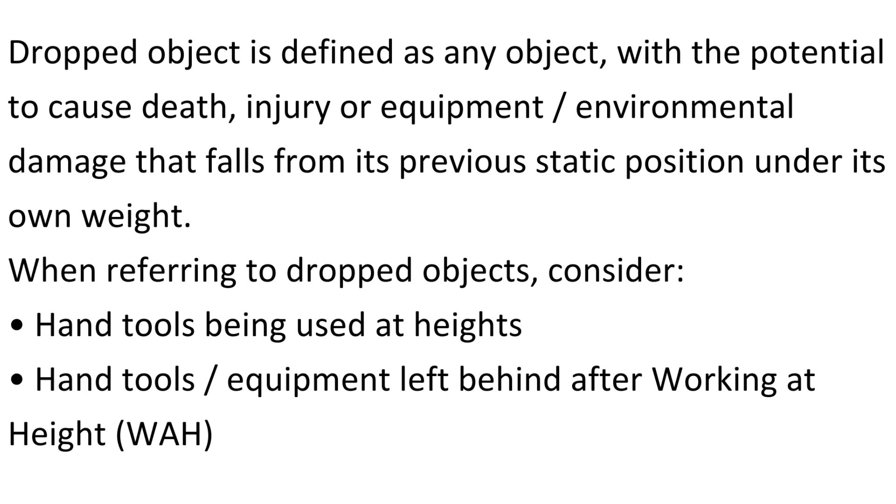When referring to dropped objects, consider hand tools being used at heights, hand tools and equipment left behind after working at height, and small items such as bolts, wedges, welding rods and clamps not within suitable storage containers, placed or forgotten at elevated work areas or placed into scaffold tubes.

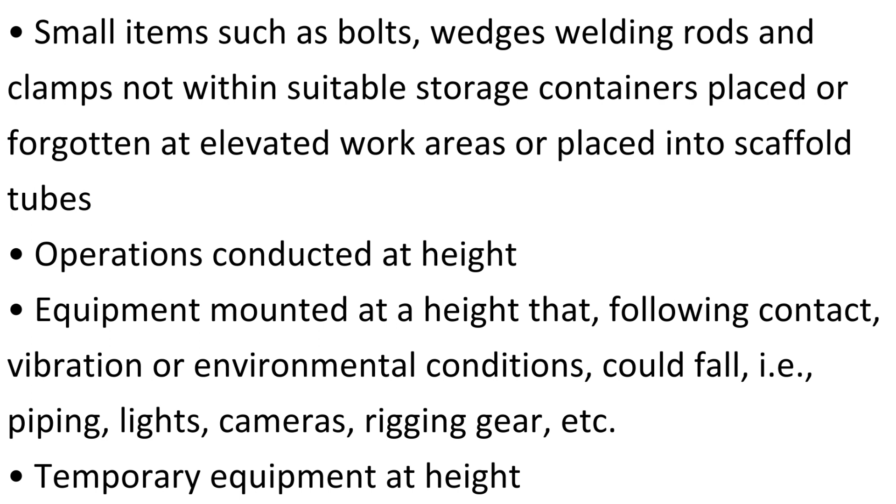Operations conducted at height, equipment mounted at a height that, following contact, vibration or environmental conditions, could fall, that is piping, lights, cameras, rigging gear, etc. Also temporary equipment at height, where personnel are working on a level directly below the work area, and lifting operations.

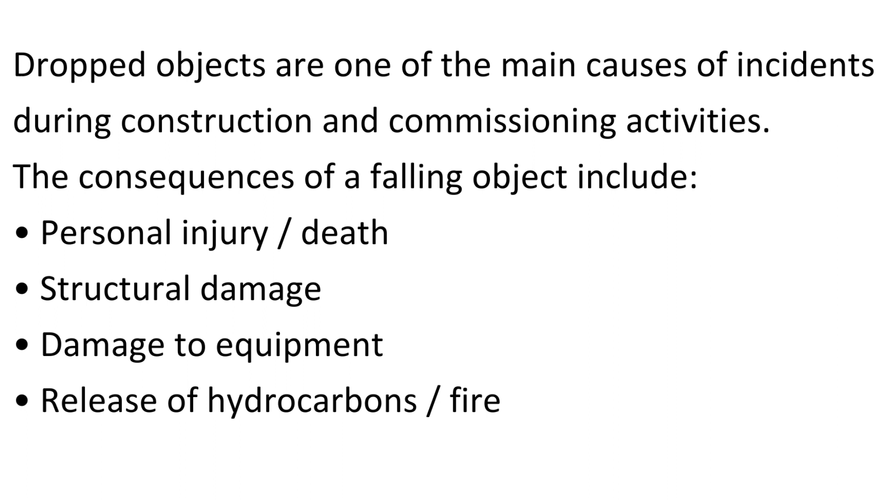Consequences of dropped objects: dropped objects are one of the main causes of incidents during construction and commissioning activities. The consequences of a falling object include personal injury, death, structural damage, damage to equipment, release of hydrocarbons, and fire.

Strategy to prevent dropped objects. Prevention of dropped objects will be based on the hierarchy of controls as listed below. Elimination: eliminate dropped object potential. Substitution: substitute the need to take objects that might drop by performing activities on the ground.

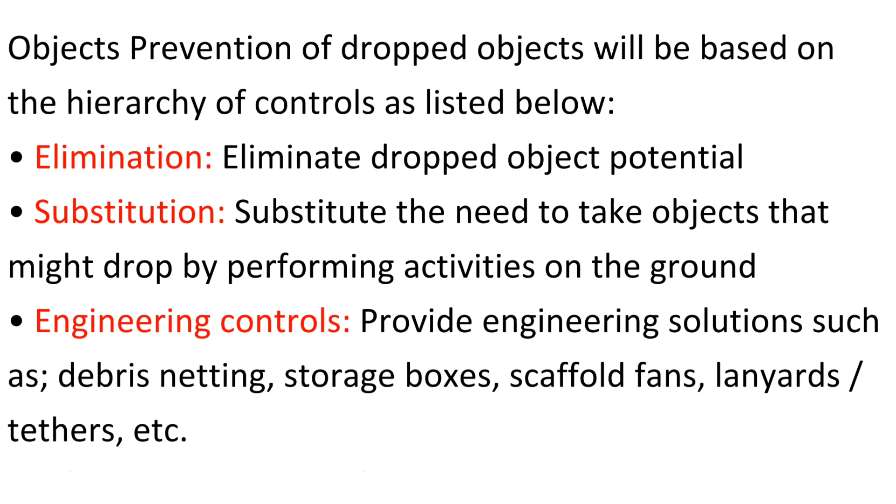Engineering controls: provide engineering solutions such as debris netting, storage boxes, scaffold fans, lanyards, tethers, etc. Administrative controls: training, TBT, awareness campaigns, etc. PPE: provide suitable PPE to protect personnel against dropped objects.

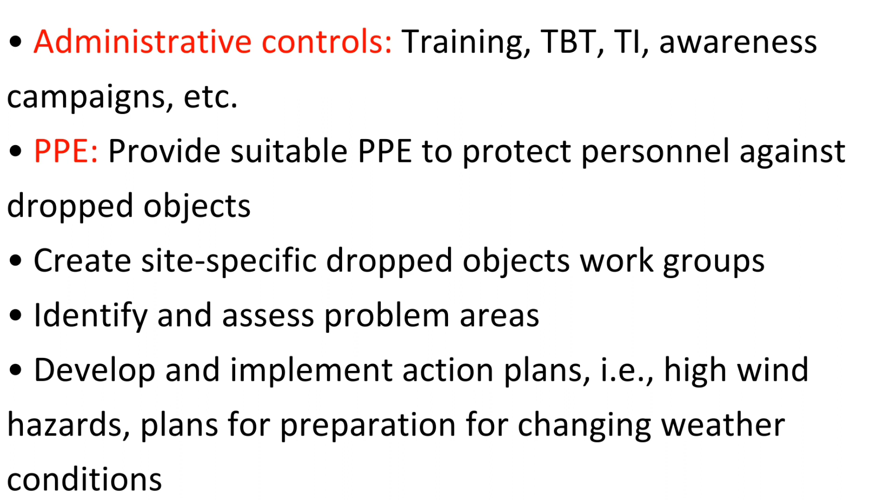Create site-specific dropped objects work groups. Identify and assess problem areas. Develop and implement action plans, that is, high wind hazards, plans for preparation for changing weather conditions. Monitor results and continually improve.

Risk areas prone to dropped objects. Experience from lessons learned indicated that the following are the most common areas on a construction site prone to dropped objects incidents. This list is not all inclusive.

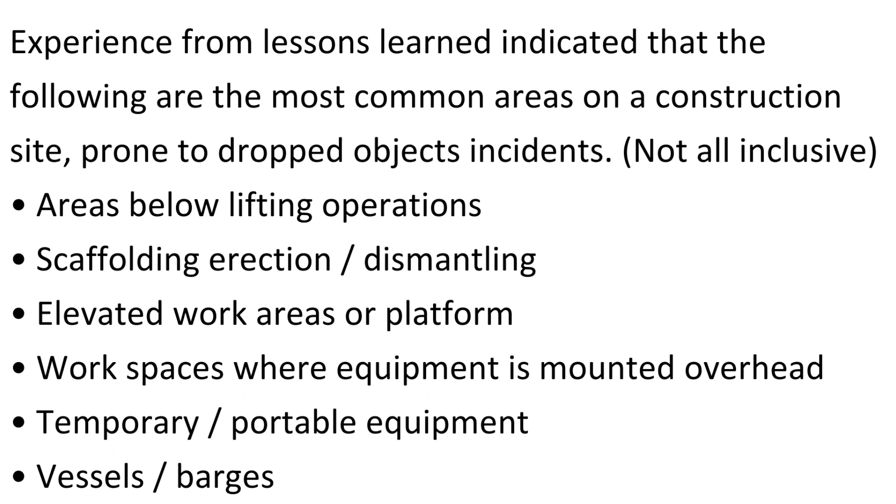Areas below lifting operations, scaffolding erection and dismantling, elevated work areas or platforms, workspaces where equipment is mounted overhead, and temporary, portable equipment on vessels and barges.

Pipe racks, bolting, unbolting, grinding, flange installations, etc. Unsecured loads on forklift trucks. Poor stacking of materials. Loading and unloading of material from trucks. Accessing ladders with tools. Work near deep excavations where objects or stones can fall in.

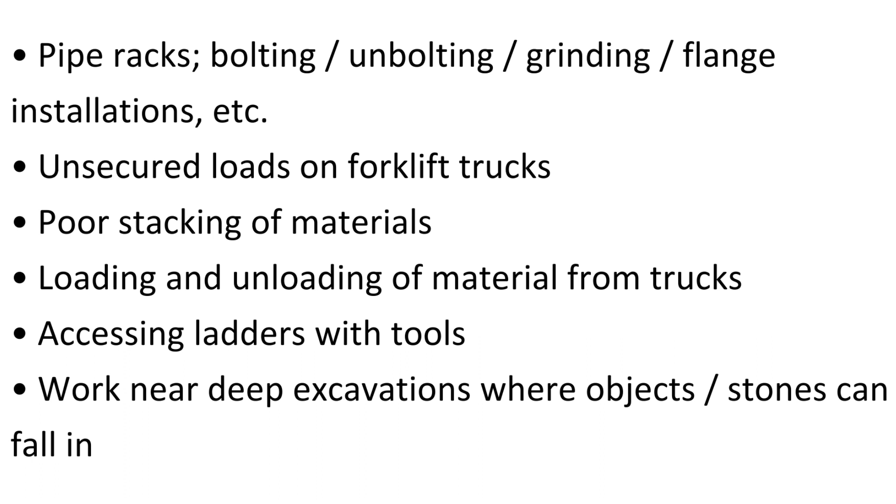Causes of dropped objects: inadequate application of the dropped object hierarchy of controls, poor housekeeping, scrap and debris left aloft, lack of or poor inspection, no equipment maintenance, and poor designs.

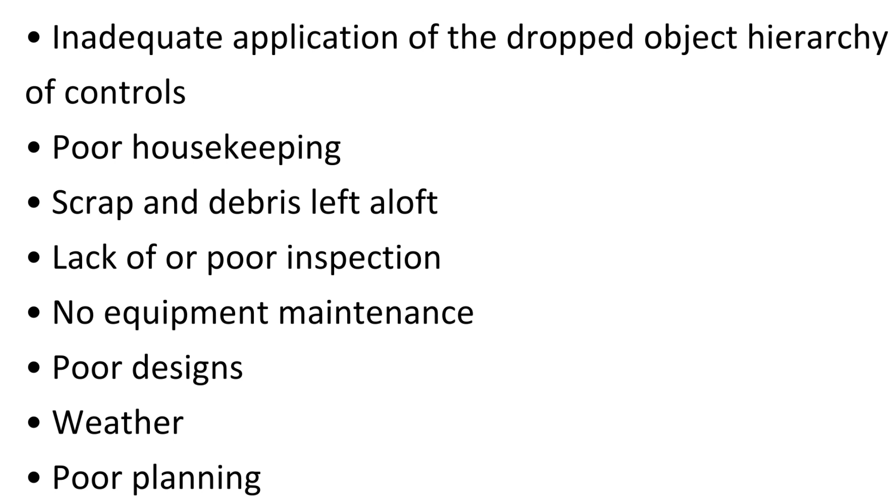Weather. Poor planning. Load miscalculation or poor quality inspection of lifting gear. Lack of risk assessment. Instability. Ineffective control of equipment or tools taken aloft.

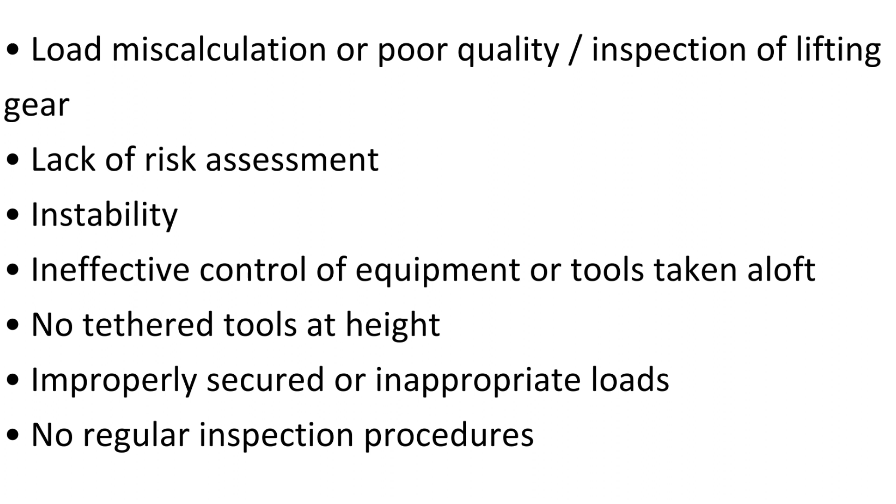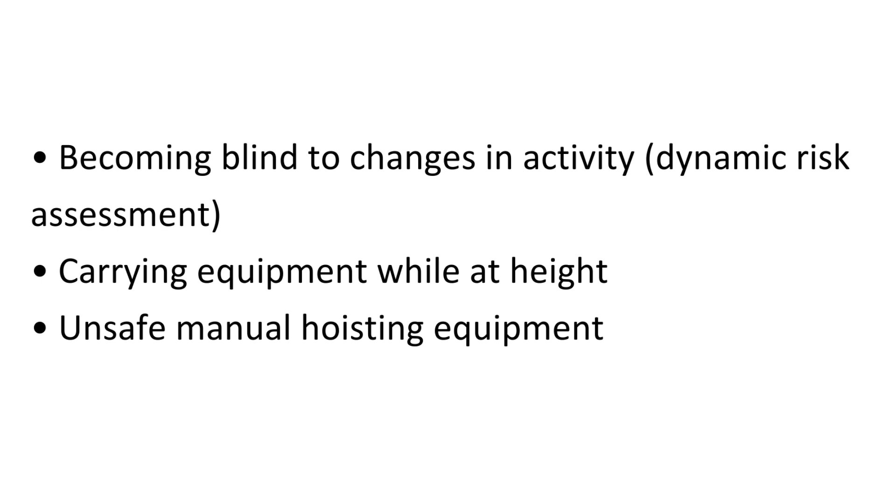No tethered tools at height. Improperly secured or inappropriate loads. No regular inspection procedures. Becoming blind to changes in activity, dynamic risk assessment. Carrying equipment while at height. Unsafe manual hoisting equipment.

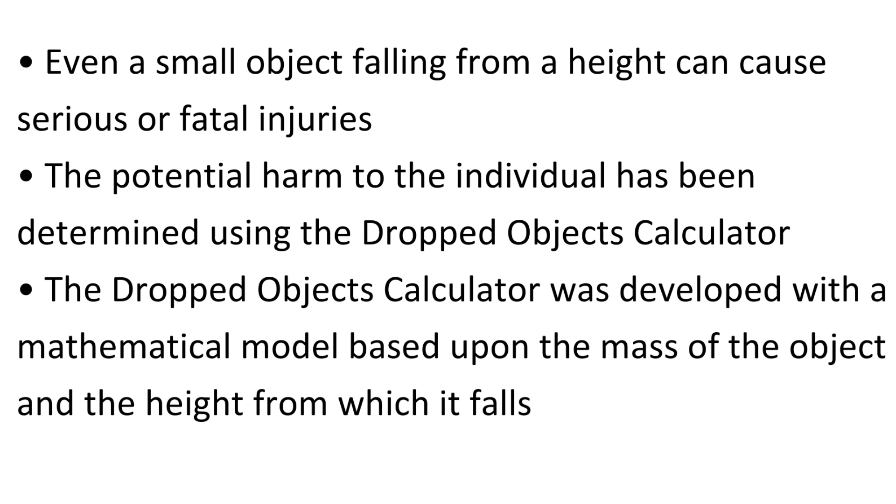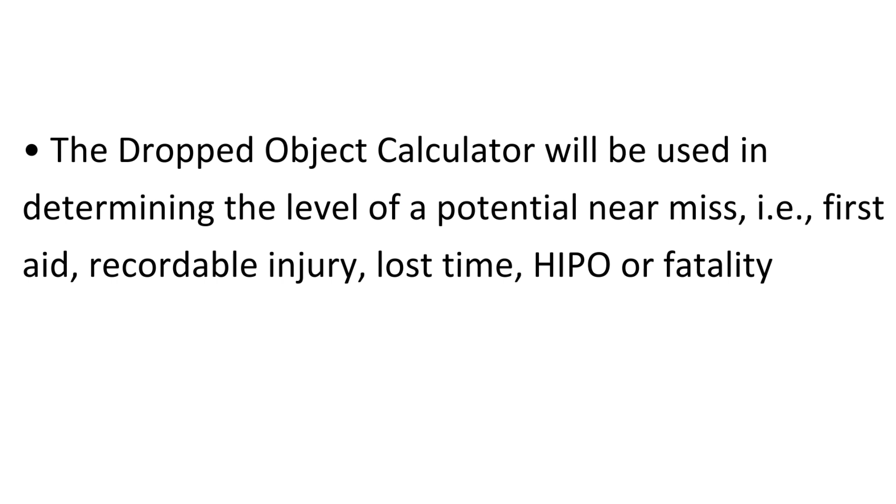Impact of dropped objects: even a small object falling from a height can cause serious or fatal injuries. The potential harm to the individual has been determined using the dropped objects calculator, developed with a mathematical model based upon the mass of the object and the height from which it falls. The calculator will be used in determining the level of a potential near miss, that is, first aid, recordable injury, lost time, HIPO, or fatality.

Dropped object prevention: subcontractor SHES and construction personnel will establish a dropped object work group specific to the site. The objectives of the dropped objects work group will be to complete a worksite dropped objects inventory using a hazard ID tool based on the dropped objects hierarchy of controls.

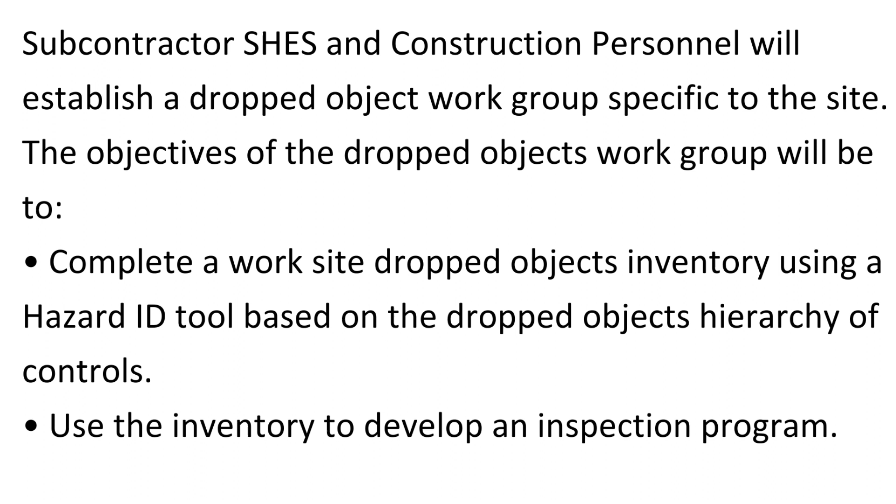Use the inventory to develop an inspection program. Introduce drop object mitigations into the project's WAH procedure as the project progresses from one phase to the next. Ensure project management provide toolkits, and ensure the workers use them when working at height; implement processes to account for tools.

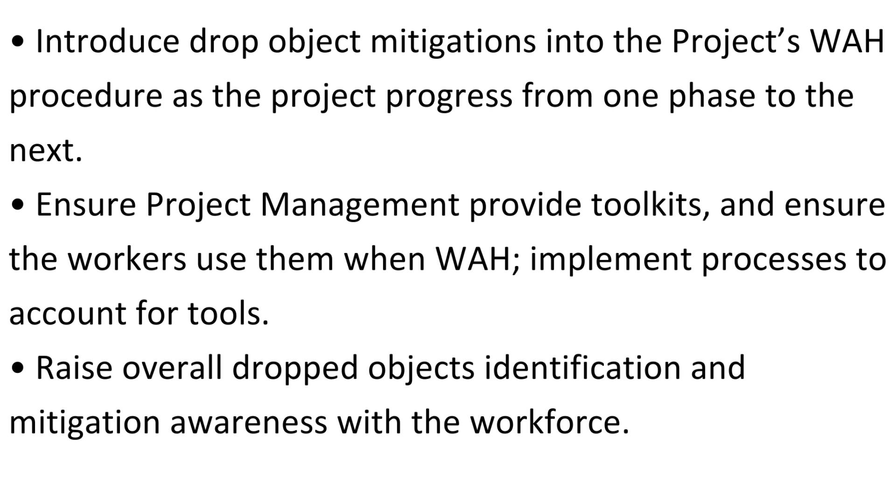Raise overall dropped objects identification and mitigation awareness with the workforce. Train relevant personnel to identify and mitigate dropped objects processes. Secure tools from dropping to lower levels.

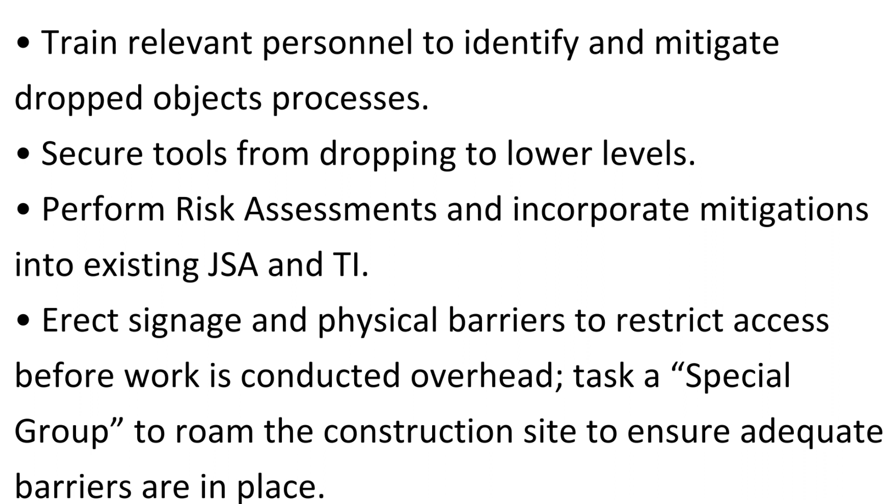Perform risk assessments and incorporate mitigations into existing JSAs. Erect signage and physical barriers to restrict access before work is conducted overhead. Task a special group to roam the construction site to ensure adequate barriers are in place.

All rigging risk assessments require consideration of the risks involved in moving equipment at height. It may be required to add checks for dropped objects in pre-lift checklists to ensure that all packing material and other loose objects have been removed.

Review and revise JSAs for dropped objects potential. Introduce regular dropped objects campaigns.

Schedule regular hazard hunts, identifying hand tools are tied off, no loose objects, no unprotected openings in grating. Openings around pipe spools penetrating gratings are closed, toe boards in place, regular housekeeping performed, and barricades are in place when needed, etc. Review handling and securing procedures for tubular components.

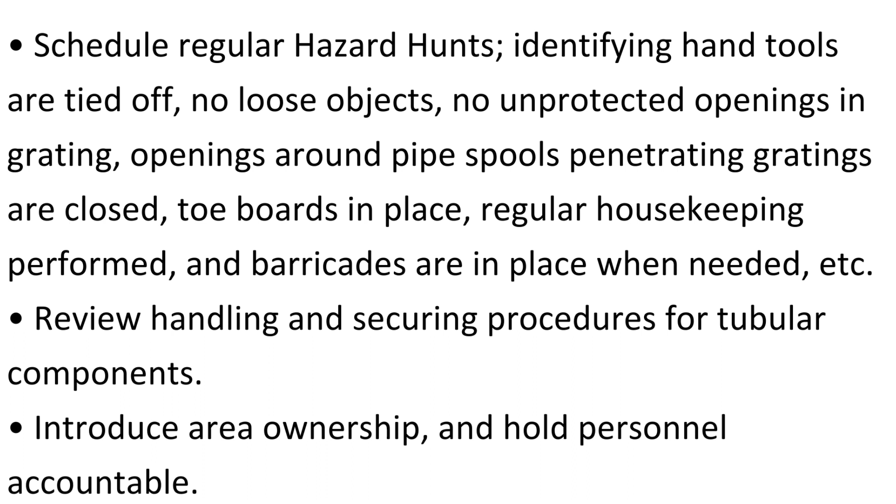Introduce area ownership, and hold personnel accountable. Add secondary retention, and use safety systems, such as safety nets.

Ensure inspection of personal protective equipment, PPE, for example, safety harness and lanyards, mandating the use of chin straps at all times while tools are tethered. Inspect all overhead equipment and locations for loose items that may present a hazard following task completion.